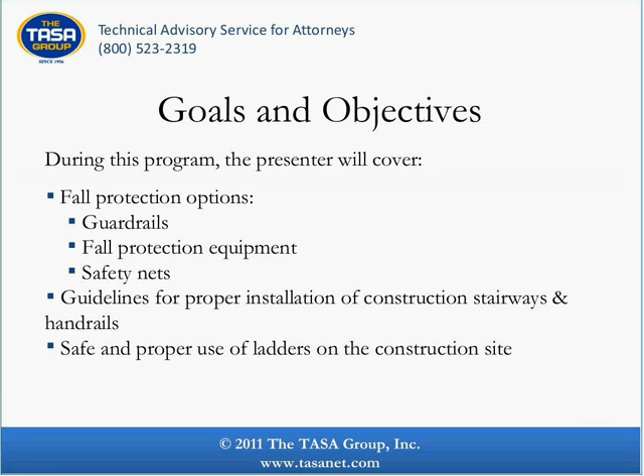During today's program, our presenter will cover the following: fall protection options, guardrails, fall protection equipment, and safety nets, guidelines for proper installation of construction stairways and handrails, and the safe and proper use of ladders on the construction site.

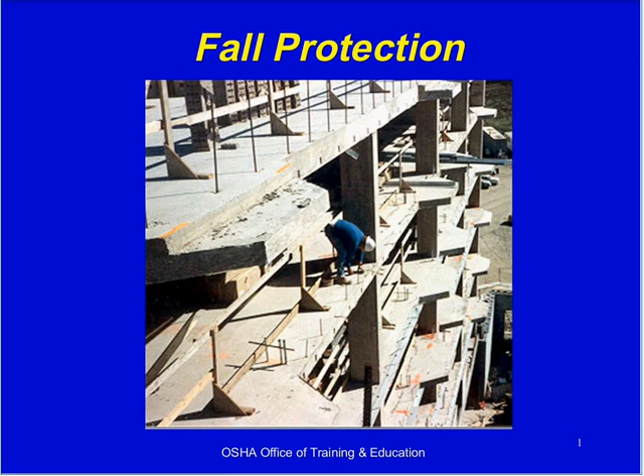Fall protection. Falls in construction are the leading cause of deaths in the construction industry. I do a lot of construction accident work, and a lot of that has to do with construction workers who have fallen.

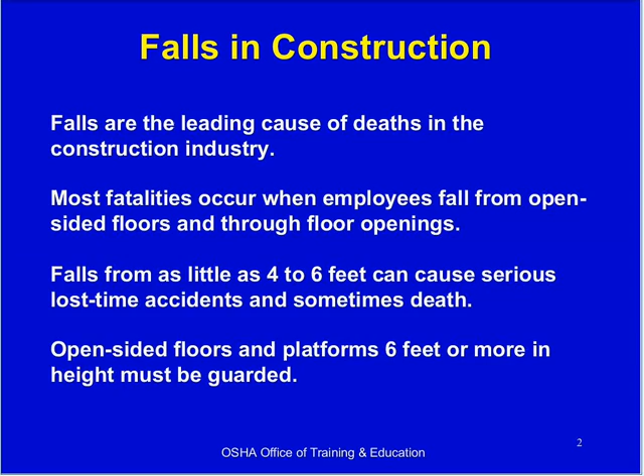We'll be working on various conditions that require the use of fall protection and the options available. Just a couple of goals here, what you'll be able to take away with regards to your knowledge: fall protection options.

Number one would be a personal fall arrest system. When you hear that somebody is tied off, what that means is that they are wearing a harness and they are tied to a tie-off point with a lifeline that's fastened to the harness. These are usually used at fairly significant heights. That's called the Personal Fall Arrest System, PFAS. There are certain very specific guidelines with regards to the condition of the vest, the inspection of the vest or the harness, the amount of strength of the tie-off point, and so on and so forth.

Another fall protection option, of course, is guardrails, temporary guardrails, as you can see in this middle photograph here. I have it right here. You see this on every construction site. There's a top rail, a mid rail, and a toe board. The toe board is meant to prevent, if you have a tool or a piece of material lying right here, to prevent that from being accidentally kicked off and thus falling over the edge.

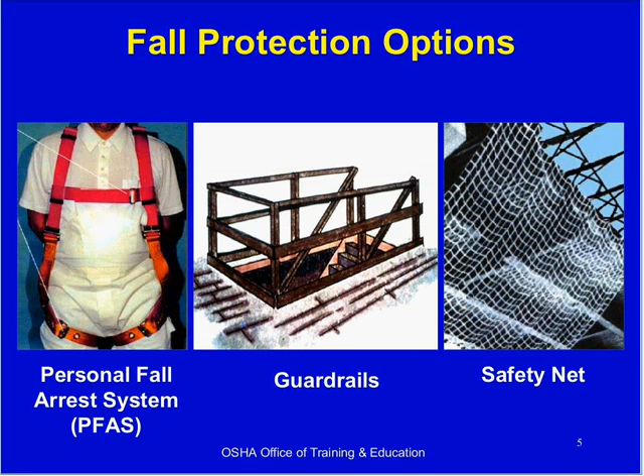Safety nets, of course, are also used at fairly significant heights. You see those on construction projects quite often.

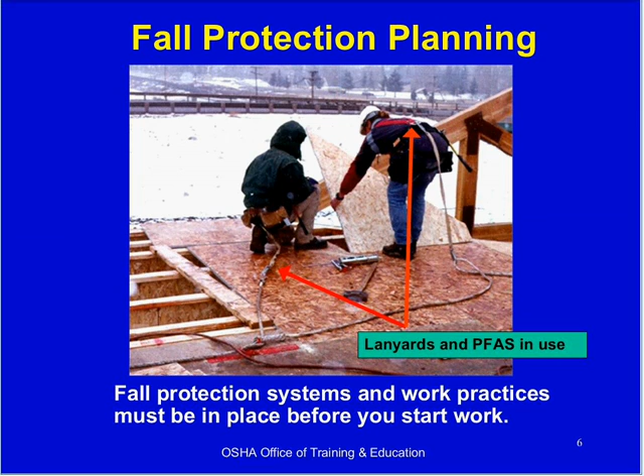These guys are tied off. They're wearing a harness, and they're tied off to a point over here via these ropes. So if they slip and fall over the edge, they'll be protected.

That's an example of a harness. Training is necessary: how to put it on, how to fasten it, basically how to use it, where to tie it off to, and make sure that it's strong enough to withstand the downward force.

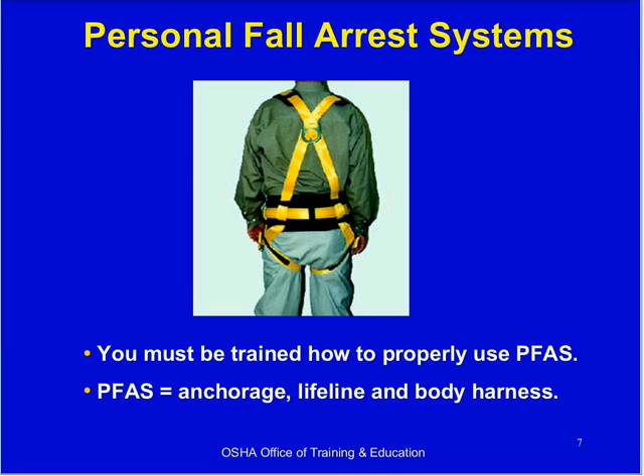This is a safety line. It must be independent of the platform anchorage and capable of supporting at least 5,000 pounds per worker.

This is a retractable lifeline, so as he goes up and down, he doesn't have a continuous loop that he could trip over. This is a self-retracting type system.

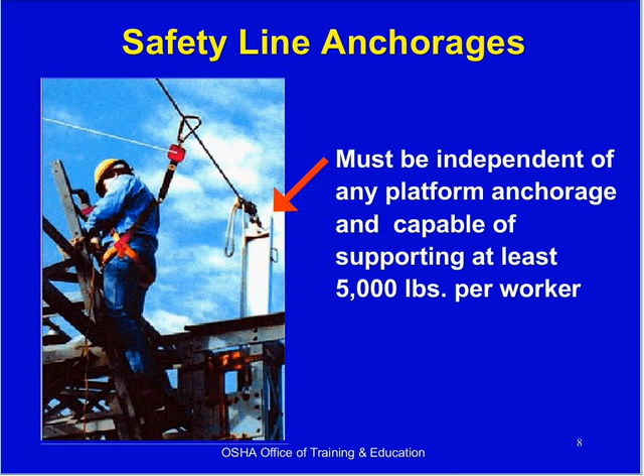Guardrails, of course, around openings, stairways, skylights on a flat roof, open edges, floor edges are necessary. The top rail must be between 39 and 45 inches up off the floor.

The mid rail, of course, and the toe board, as I just explained, is necessary, 3.5 inches high or more, to prevent materials or tools from accidentally being kicked over the edge and landing on somebody's head.

This top rail must be capable of withstanding 200 pounds of lateral force. Lateral, of course, meaning left to right.

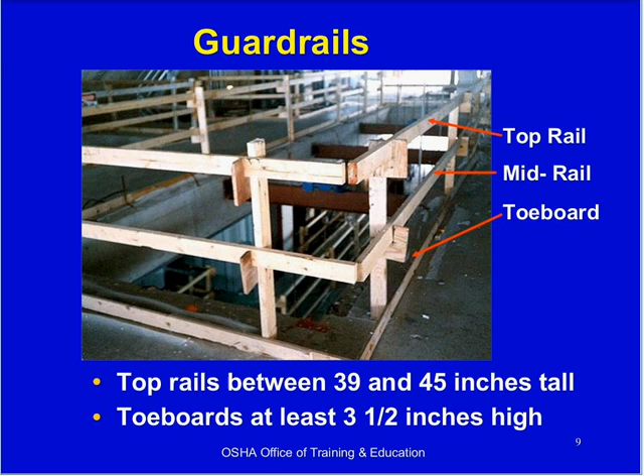Safety net, placed as close as possible. What that means is as close as possible to the working area, but no more than 30 feet below where the employees are working.

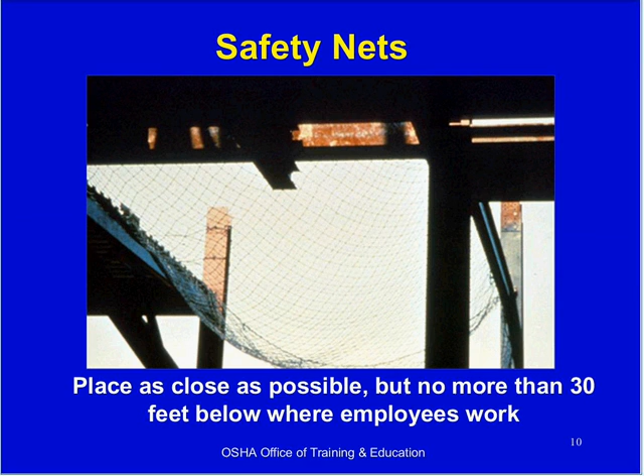Fall protection is required, as an example, on these various circumstances.

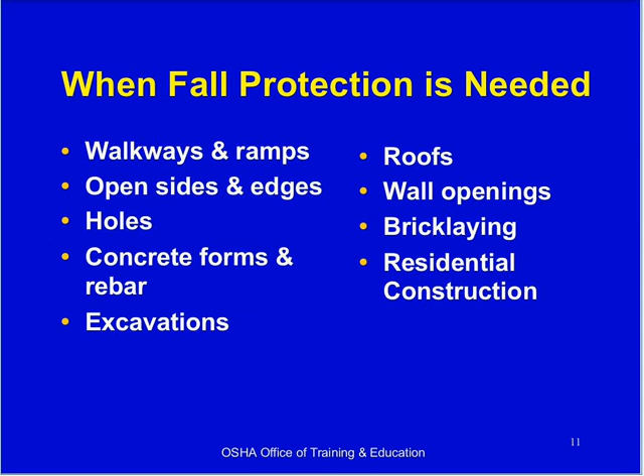Walkways and ramps. Have a stair railing here, a ramp railing. You can't really see it very well, but there's a toe board right here, a mid rail, and an upper rail.

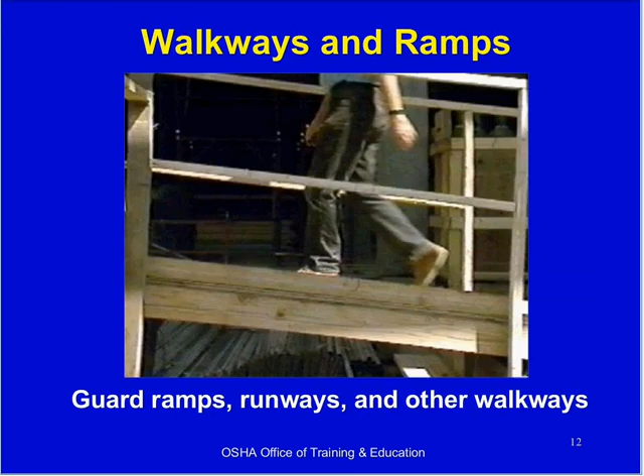Residential fall protection on residential construction. The OSHA regulations vary slightly from commercial to residential. Residential is typically low rise, from 1 to maybe 3 stories. So with regards to fall protection, residential is a little different, but the same basic principles apply.

If you can fall more than 6 feet, then you need fall protection. Not necessarily a harness. A harness with a lifeline isn't going to do a whole heck of a lot of good at such a low level. By the time you stretch to the end of that lifeline, wearing the harness, you could very easily hit the ground.

So basically, typically in residential construction, what you're going to see is fall protection in the form of handrails and guardrails, primarily. Safety nets, again, can't put a safety net at such a low level. By the time the net extends to its lowest point, you're going to hit the ground while you're within the net.

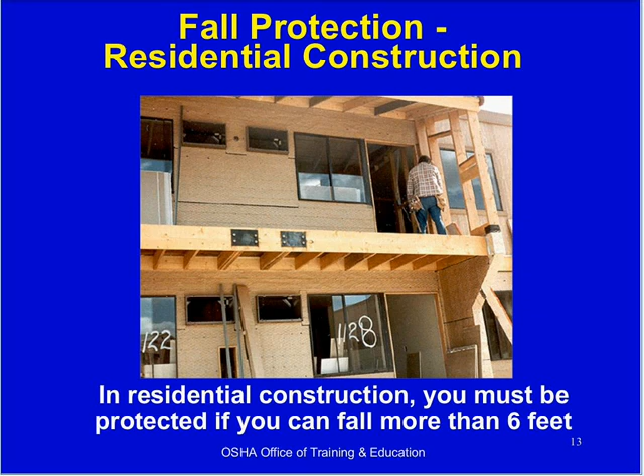This is a good example. I don't know how high up this worker is. Could be at a very significant height, and he's working right along this unprotected edge here.

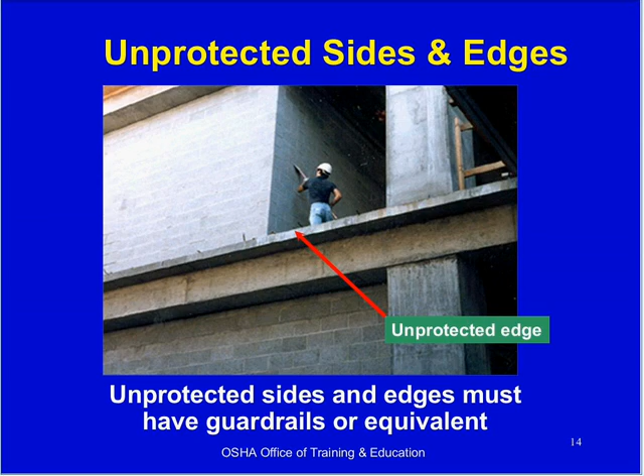Again, another good example. What they've done here is they've tied this nylon rope to this rebar here, and called it good. Well, obviously that could very easily fail.

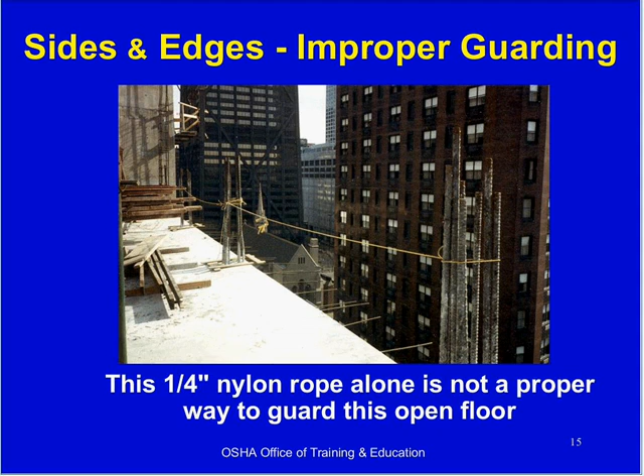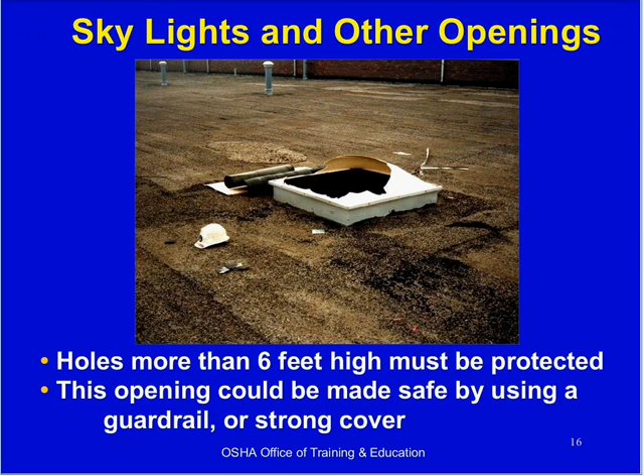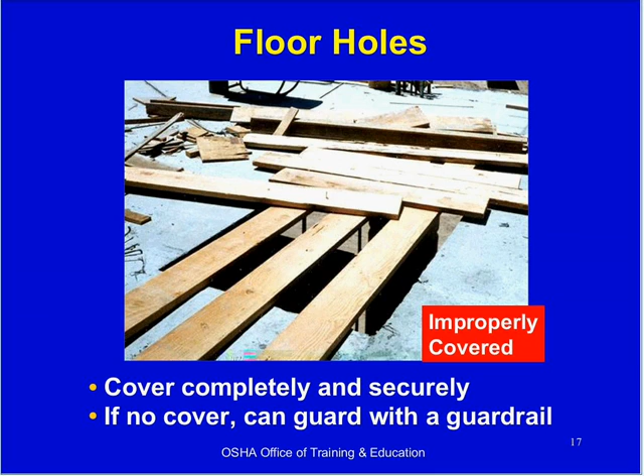This is a good example of an improperly covered opening. It's almost properly covered, but what they should have done is taken it to the next level and at least placed a piece of plywood over these, nailed to these planks, or put these planks closer together with straps perpendicular to them, thus nailing them together and preventing them from becoming separated from each other. So this is better than nothing, but it certainly is still lacking.

Concrete forms and rebar. Personal fall arrest systems are needed when working on formwork or rebar. These guys, in this particular photograph, I'm not sure—it does not look to me as though they're tied off.

When they say to cover or cap the protruding rebar, what that means is, not shown in this photograph, but down below there could be other concrete forms or footings at a lower level. You've got pieces of rebar sticking straight up, maybe half an inch to 3/4 of an inch in diameter, like a bunch of daggers sticking up out of the concrete below. If you fall on those, you can become impaled. So you cover them properly so that if somebody falls on one, yes, they'll get hurt, but they may not necessarily suffer fatality.

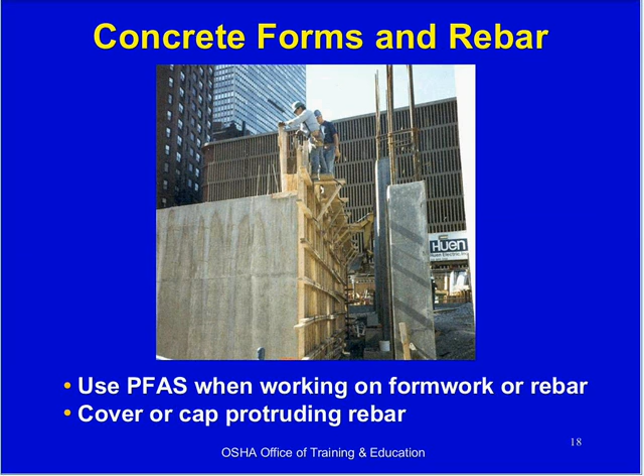They have these caps. If you see on a construction site pieces of rebar sticking up out of the concrete that have an orange-colored cap on them, that's a plastic cap used to effectively increase the diameter of the rebar temporarily, so that if anybody falls on it, they're not falling on something as thin as the rebar itself. Well, I did a very good job explaining that.

Moving on, excavations. You wouldn't think that fall protection is necessary on something that's underground, but it is. Some of these excavations are very deep. This edge should be protected. Somebody could easily fall in that.

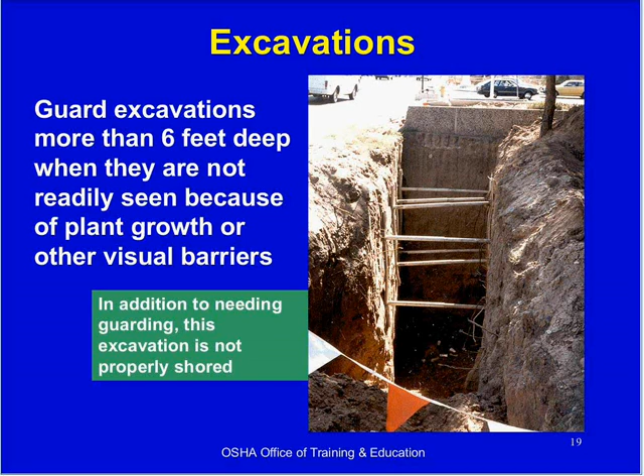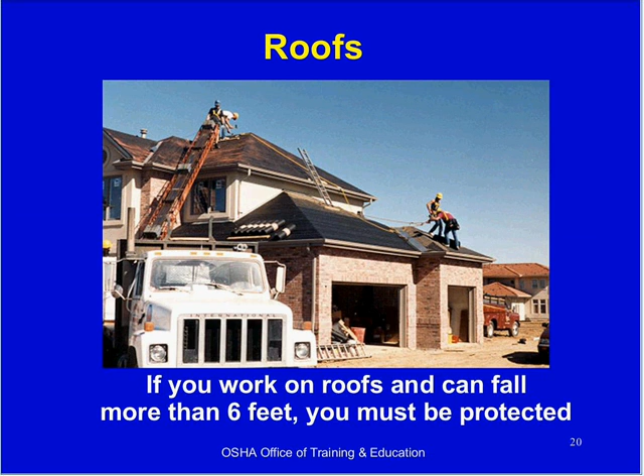Usually people think of fall protection as up above the ground. Not necessarily true. This is a residential construction site. You can see this worker here is tied off, you can see his lifeline here, he's tied off to a point up here on the roof. Again, if you can fall more than 6 feet, then you must have some sort of fall protection.

Wall openings. Again, you've got an opening here. This could easily be anywhere from 6 or 8 feet up above the ground to as high as 16 or 18 feet or more. There should be a guardrail right across this opening, a top rail, a mid rail, and a toe board.

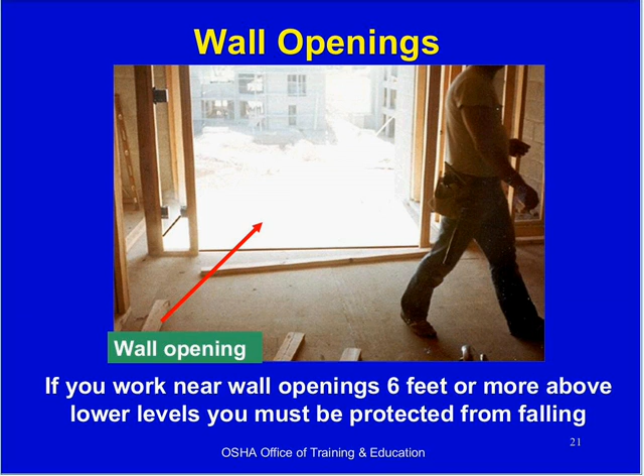Good work practices: perform work at ground level if possible. Well, obviously you're not going to roof at ground level. However, in this example, they're building prefab roofs on the ground and lifting them into place with a crane.

Tether or restrain workers so they can't reach the edge. That's not always practical either. I've worked for many years on construction sites, and you really need to be able to get to every square inch of the work area, so tethering somebody so they can't reach the edge is not real practical.

Safety monitors, designate and use safety monitors, meaning somebody basically stands there and monitors everybody. That's not practical either, that costs money. Of course, conventional fall protection - the most conventional, most practical fall protection is going to be guardrails.

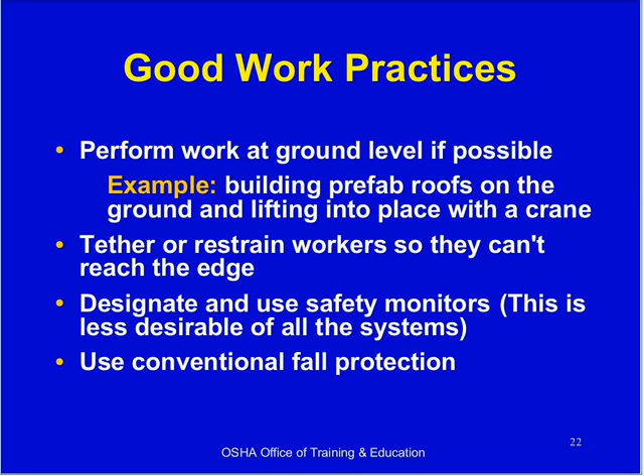In this example, building prefab roofs on the ground, what they're talking about is roof trusses, say wooden roof trusses that typically would go on top of the walls individually. You can actually assemble the roof - I've seen this done, I've done it myself - on the ground with many trusses spaced accordingly, usually 24 inches on center, and you can effectively build sections of the roof and lift them into place with a crane so that each truss does not have to be individually placed. Again, that all depends on site conditions and lots of different factors.

Training, of course, is very important with regards to any sort of construction safety standards. A lot of people think that climbing a ladder or whatever it may be doesn't really require any training. Well, it does.

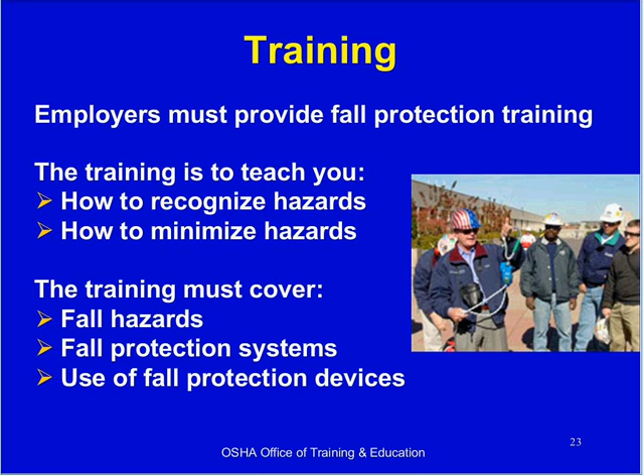So the primary goals of training your workers is teaching them how to recognize hazards, which can occur very quickly, and how to minimize those hazards, and also train them in the proper use of the equipment, the proper installation of a harness, lifeline, guardrails, and that kind of thing. So training is a big one. I do a lot of cases where the worker has received absolutely no training whatsoever, and sometimes they do some pretty careless things as a result.

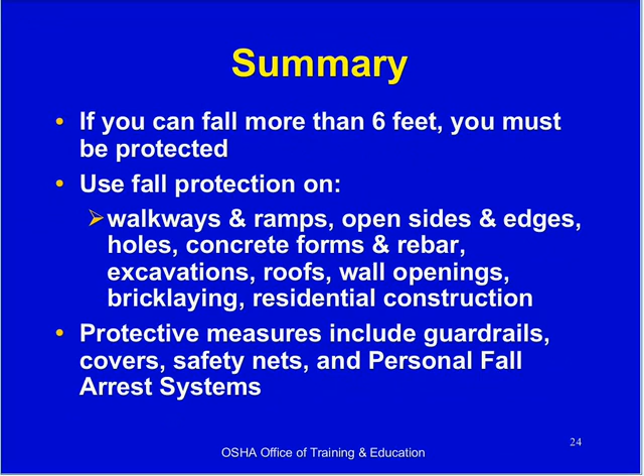So to summarize the fall protection segment of this presentation, again, if you can fall more than 6 feet, you must be protected. Typically, you're going to use fall protection on walkways, ramps, open sides and edges. What they mean here is floors, holes from skylights, stairways, concrete forms, excavations, and so on. The main sources or types of fall protection are guardrails, covers, safety nets, and personal fall arrest systems, aka a harness and a lifeline.

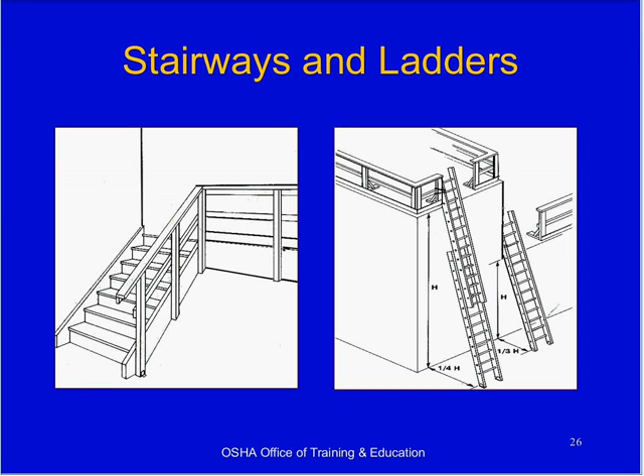Now we get into stairways and ladders, so let's get going on that. Hazards are quite obvious - stairways and ladders cause many injuries and fatalities. I've handled some cases - one that comes to mind, the guy fell about 6 or 8 feet on a construction site in Manhattan. He really got hurt. So it doesn't take much. Even though he was only maybe 6 or 7 feet up off the ground, he could really suffer an injury.

You also have to realize - and I've been asked this before - are people tied off when using a ladder? The answer is no, unless they're up high using a ladder to go from one level to another, and that lower level is still considerably high up off the ground. If you've got a guy who shows up with an extension ladder, you can't tie off because you have to get to the bottom of the ladder. If the lifeline is long enough to let you get to the bottom, it's not going to do you much good. So that's one reason why ladders are so dangerous - you fall off, you're not tied off, you're gonna hit the ground. Period.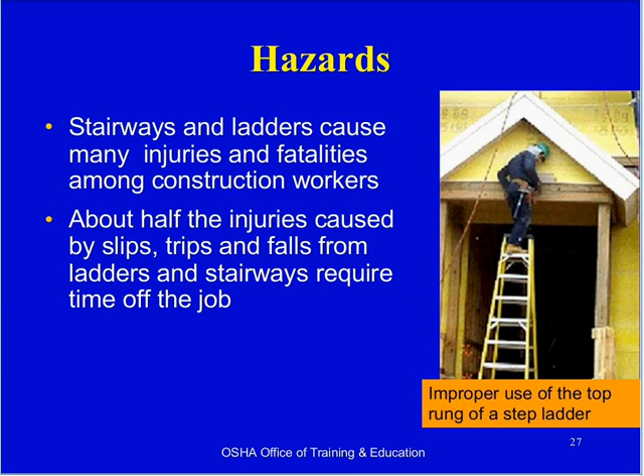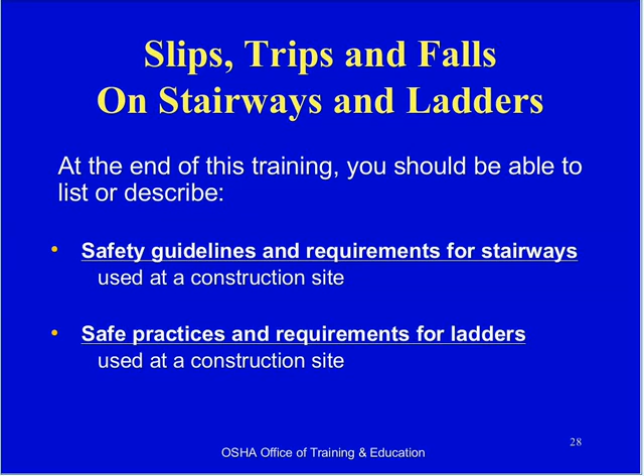So again, at the end of this training, you should be able to list or describe safety guidelines with regards to stairways and safe practices for the use of ladders.

When is a ladder or stairway required? This would be one floor level, and this would be another floor level here. 19 inches or higher requires a ladder or some sort of step. Obviously, you're not going to use a 19-inch ladder, so there should be a little step in here.

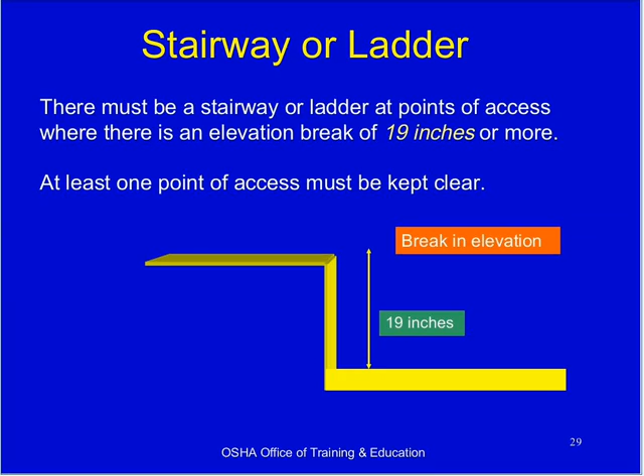Okay, handrails versus stair rails. This is a handrail - it's mounted to the wall, and you can grasp it as you're ascending or descending the stairway. This picture doesn't show very well, but this is a stair rail system that would be mounted to the outer edge of this stairway to prevent somebody from falling off.

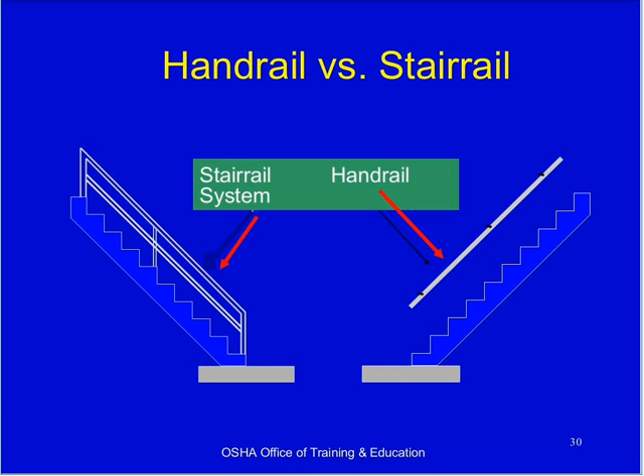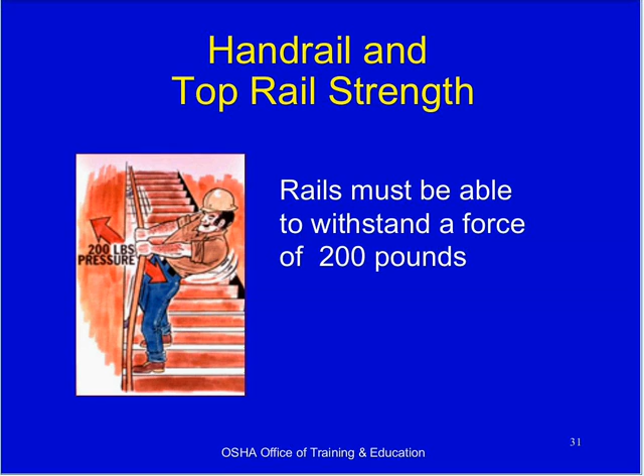Handrail, once again, must be capable of withstanding 200 pounds of lateral pressure, so if a construction worker or two happens to fall against it, it will hopefully hold them up. Stairways with 4 or more risers - each one of these vertical, 1, 2, 3, 4, 5, plus this first one, essentially 6 risers - or higher than 30 inches must be equipped with at least one handrail.

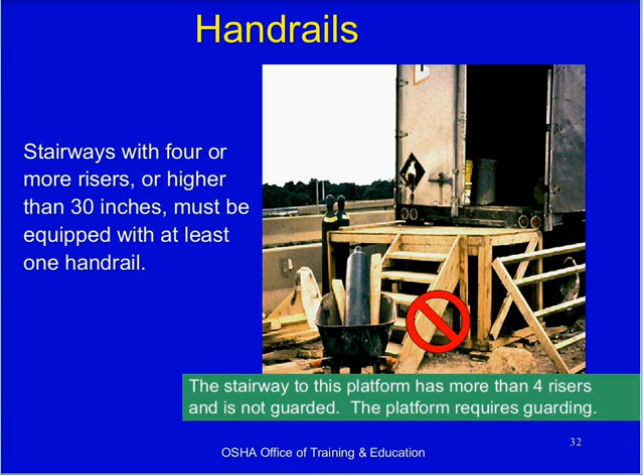Again, both sides of this stairway are not guarded at all, and the stair rail system essentially would be fastened to the outer edge on each side of this stairway. He could be two or three stories up right now, certainly high enough off the ground to cause some severe injury.

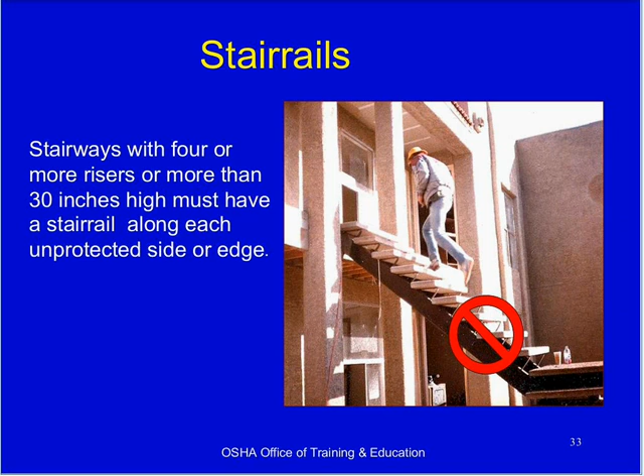You also have to realize that on a construction site, there's tools all around, air hoses, extension cords. As a matter of fact, I see one here, and maybe one right here, that you can easily trip over. Building materials all over the place. It's not just a stairway, it's a construction site. It's a stairway on a construction site, essentially is what it is.

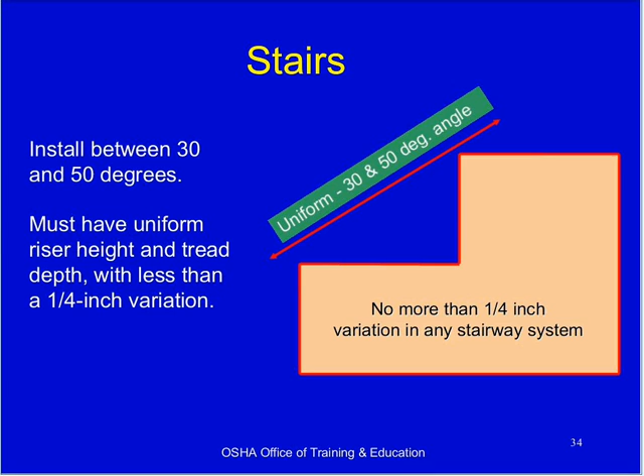But ergonomically, from a human usage standpoint, it doesn't take much of a variation for you to lose your balance a little bit. So that is why they can't vary much. You can lose your footing just by becoming accustomed to a certain height and then having it interrupted by yet another height.

Temporary stairs only use pan stairs if they're filled with filler material. Now, what that means is this is most likely a commercial stairway. This is a horizontal stair tread that you step on, and this is shaped like a pan. It's got a side, a bottom, and then another side here. And this gets filled with concrete, and then it gets maybe tiled, or painted, or there's different methods of finishing it off. But in the meantime, this is essentially an empty pan.

I have a case right now, as a matter of fact I just got the material yesterday, where a worker was walking down a pan stairway, and his toe got caught on this edge because it's sticking up. He was stepping into a pan that was not yet filled with anything, with concrete typically, and he tripped and fell and got hurt.

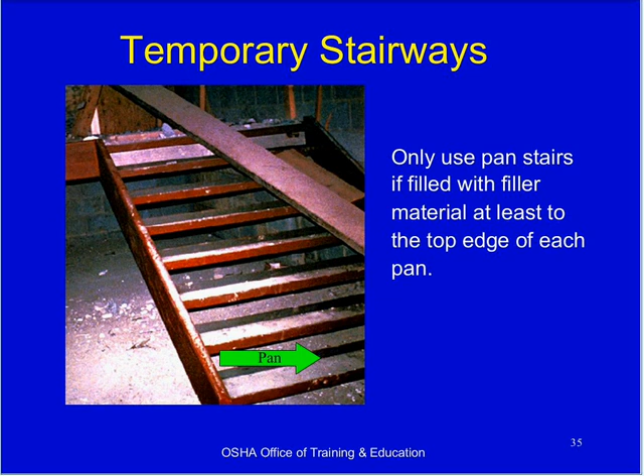Yeah, that was not me.

Landings, stairway landings, must be at least 30 inches deep and 22 inches wide every 12 feet or less of vertical rise. And that is so that the stairway isn't so long. So every 12 feet or less of vertical rise means that as you ascend or descend the stairway, there's a landing at least at 12 feet that you can stop, reposition, or rest, or whatever it may be.

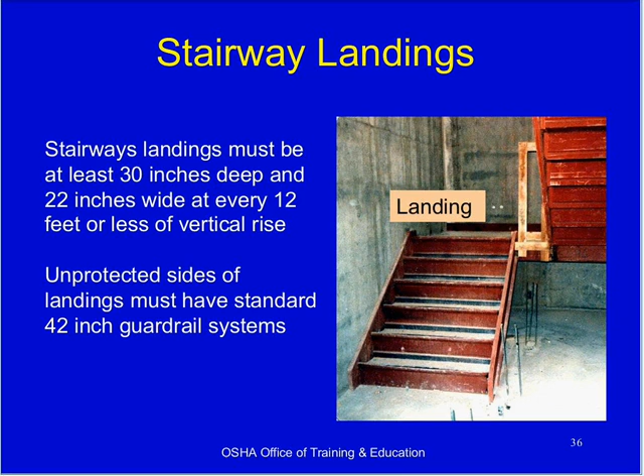Unprotected sides of landings must have standard 42-inch guardrail systems. So if this concrete wall were not there, and if this concrete wall were not there, then you would have to have a guardrail here, made the same as what we've discussed before. As a matter of fact, they've got a little guardrail right in here to protect that. But they don't have a railing on this side of the stairway, as hopefully they would, maybe it's not done yet.

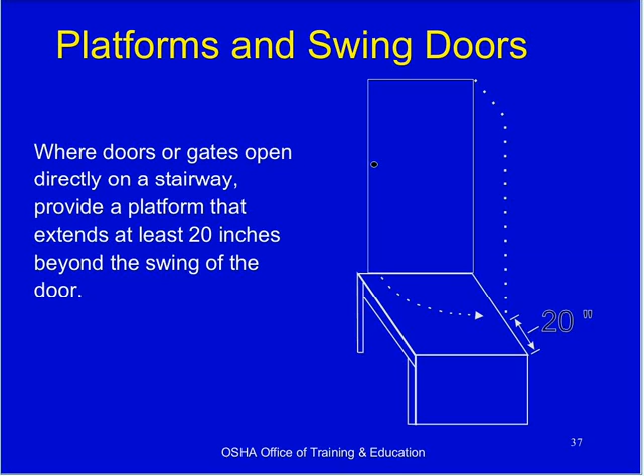Okay, platforms and swing doors. You see construction site trailers with temporary platforms on the back and a stairway leading up. Those trailers are used for storing materials. The door swings open, or you see any number of different scenarios, and this is a standard that applies to that. 20 inches in here, so that you can stand, open the door, back up, get out of the door's way, whatever it may be, and have a place to stand without falling backwards at the top of that open edge.

Obviously, dangerous conditions. Somebody probably spilled some oil or something there.

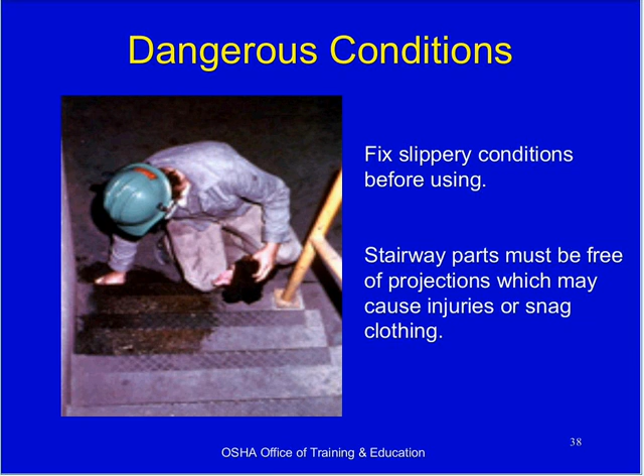Ladders. Okay, here we go. General ladder requirements. Obviously, they must be safe, kept in a safe condition.

Keep the area around the top and the bottom of the ladder clear. Ensure that rungs are what you step on. Cleats and steps should be level and uniformly spaced, 10 to 14 inches apart, and kept free from slipping hazards.

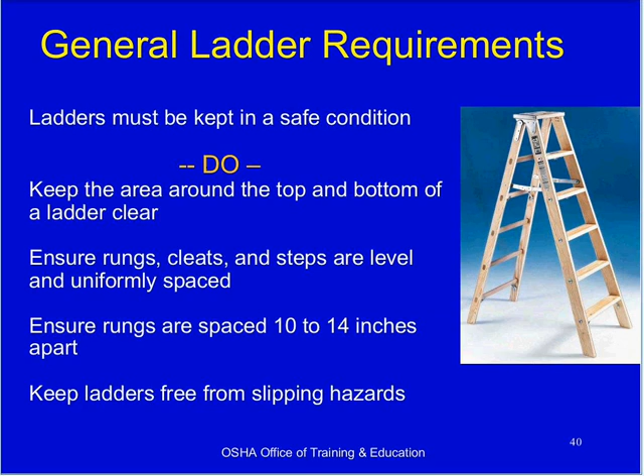Use ladders only for their designed purpose. I have seen guys use a ladder as a plank, which is not what it's designed for by any stretch—a horizontal plank with like a 2x12 sitting within it. Definitely not designed for that. I've seen workers use a ladder as a scaffold, setting up one ladder on the left, one on the right, and running a plank in between the two. That is a no-no.

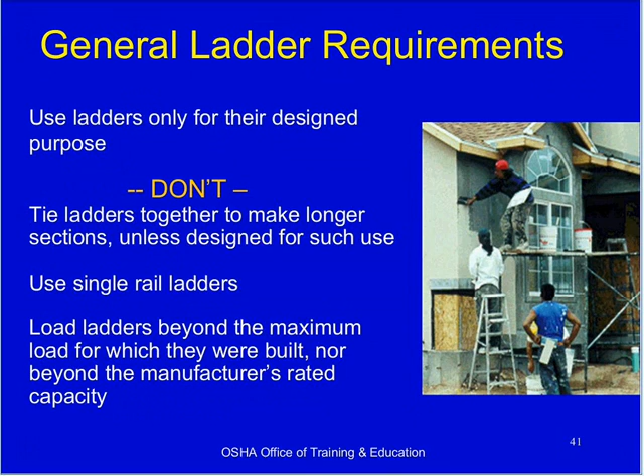Obviously, don't tie ladders together to make them longer. Don't use single rail ladders, and don't load ladders beyond the maximum load for which they were built. There's a label on the sides of ladders that gives their rating, indicating the maximum load they're designed for.

Secure ladders at the top and the bottom, if possible. This ladder is not on a stable surface. It's hard to see either end in this photograph, but it looks like it's just sitting in the dirt. That dirt could be compacted on one side and loose on another. I've seen that happen many times, and it can cause uneven weight distribution, pressing one rail further into the ground, causing the top to move laterally—which, once extrapolated, can be considerable.

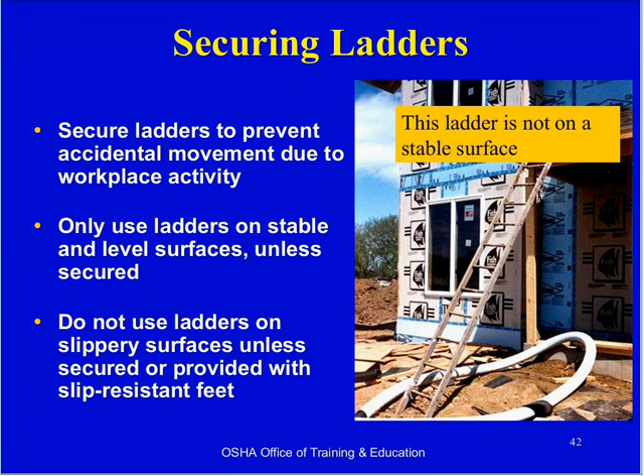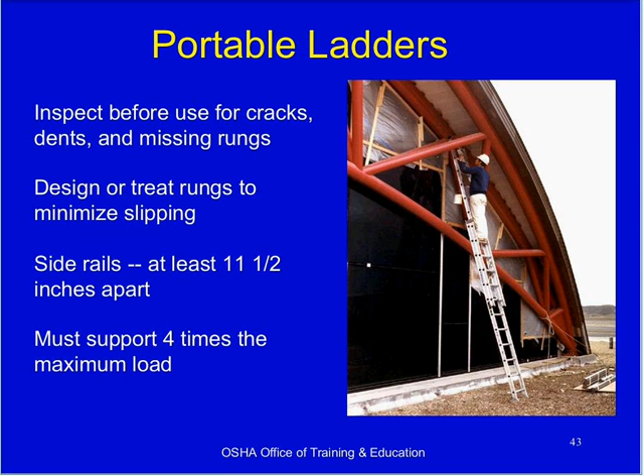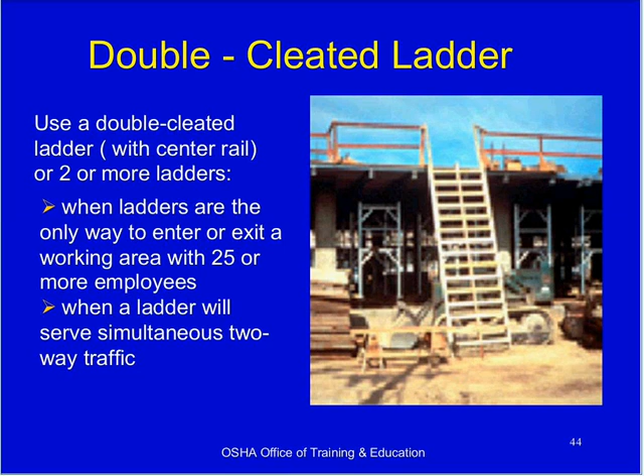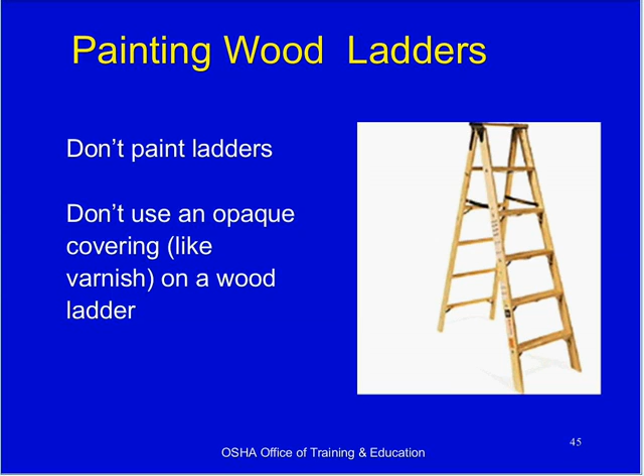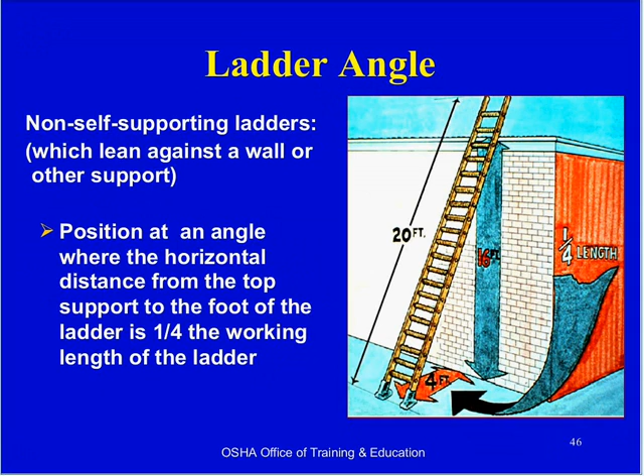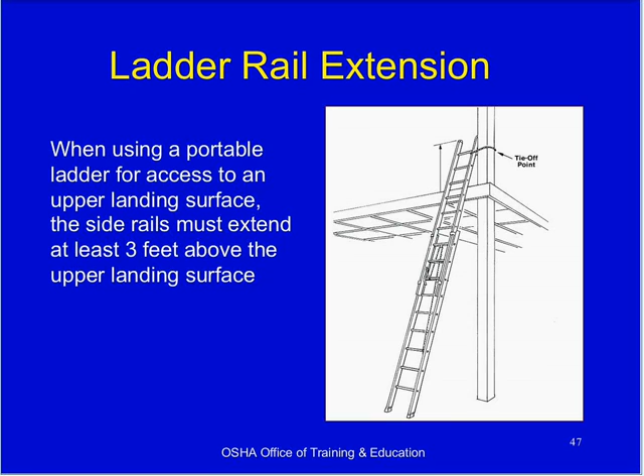The top of the ladder should also extend above the work surface so that the worker can climb up, step off, and still have something to grasp onto when stepping onto the elevated platform.

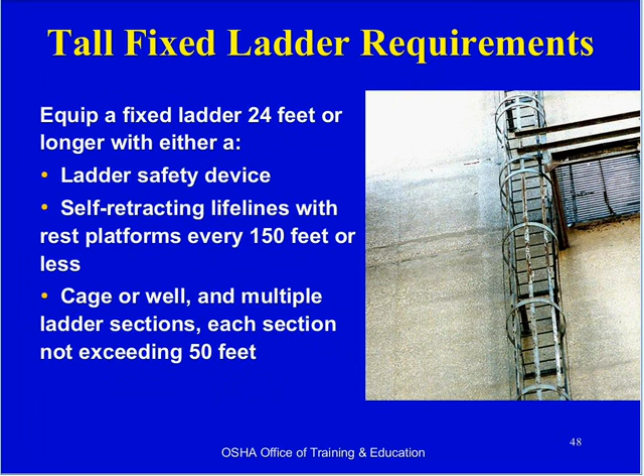This is a fixed ladder, which you typically don't see used on a construction site. It's used for maintenance on an existing building, and you see these all over the place. Again, a ladder safety device—self-retracting lifelines, a cage or a well, which is what this is. Each section not exceeding 50 feet. This goes up, maximum 50 feet, and there's a platform here where the worker can stop, rest, reposition, and so on.

Your energized electrical equipment—this is a big one too, and you see this all the time. A lot of electrical lines leading to buildings, high tension lines, are not sheathed. They're bare copper. If you take a close look, you'll see there's no sheathing around those electrical lines at all. So if you come in direct contact with or even fairly close to one of those lines, you can get electrocuted if you're using a ladder that conducts electricity.

I had a construction site a few years ago surrounded by private property, and the power to that property was delivered via above ground electrical lines that were fairly antiquated and came fairly close to the house we were building—probably maybe 10 or 12, 14 feet away—and it was just a bare copper line.

There's no rubber or plastic sheathing around these lines at all. So what I had to do was get a private utility company out there to cover the lines. You've seen maybe on the side of the road those orange covers covering the line, and that is for that reason.

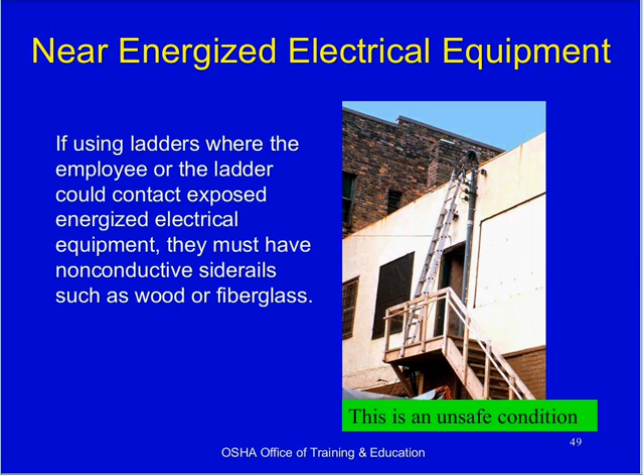So this stuff is not anything to mess around with by any means. A lot of guys take it for granted because it doesn't look dangerous, but it most certainly is.

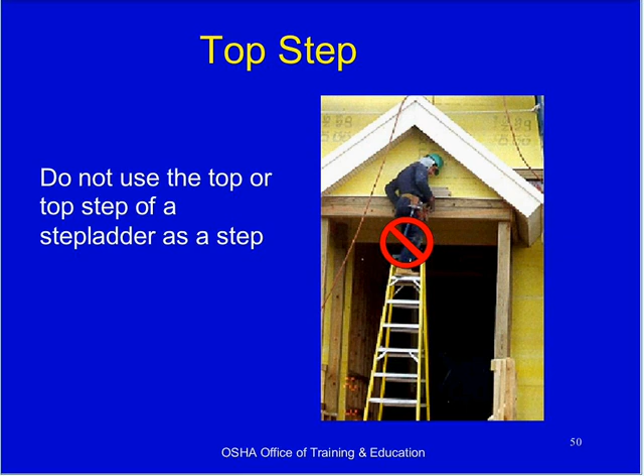Moving on, top step. Never step on the top step of the ladder, as this man's doing. Not much time we've got here.

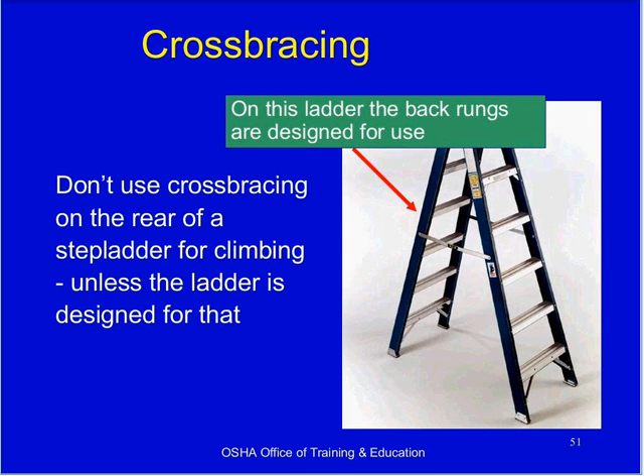Cross-bracing. Don't use cross-bracing on the rear of the step ladder for climbing unless the ladder is designed for that. You can see this ladder, the back rungs are designed for use, meaning they're designed to step on, as opposed to a thinner metal you might see in this direction, meaning it's just a one-sided ladder. This is a two-sided ladder, meaning you can use either side of it.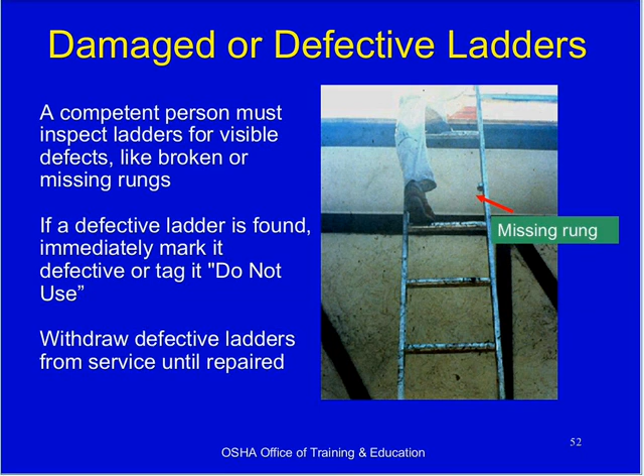So a competent person must inspect ladders for visible defects. If a defective ladder is found, immediately mark it or tag it. Do not use it until such time as it's repaired. Oftentimes in these cases, if it's a defective ladder, then the ladder mysteriously disappears, is nowhere to be found.

Climbing the ladder sounds like pretty basic stuff, but still guys make mistakes. I've seen them go down the ladder facing out. Always go up or down the ladder facing in, using one hand to grab the ladder, and don't carry any object that could cause you to lose balance. Well, that's not real practical. I've climbed up ladders many times with a bundle or two of roofing shingles on my shoulders, and those weigh probably 30 or 40 pounds each, so that's not always practical.

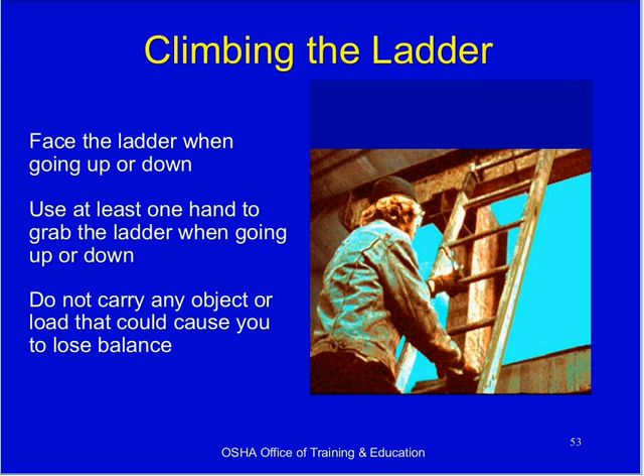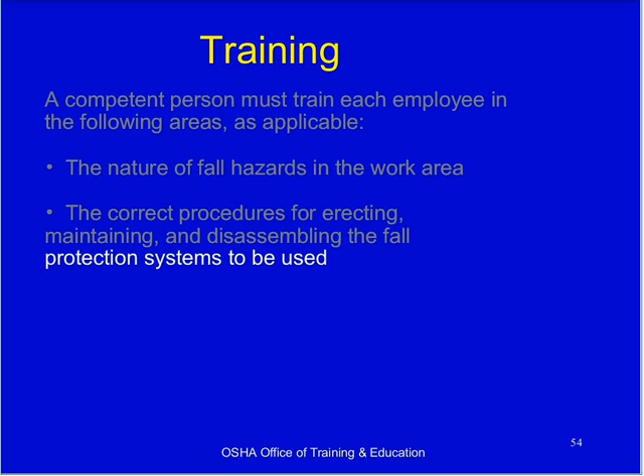Training. A competent person must train each employee in the following areas as applicable: nature of fall hazards in the work area; correct procedures for erecting, maintaining, and disassembling the fall protection systems to be used; proper construction, use, placement, and care in handling of all stairways and ladders; and the maximum intended load carrying capacities of ladders.